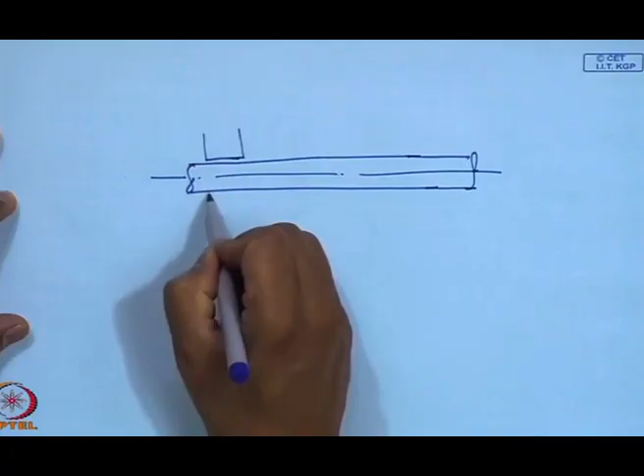I have a long rotor which is essentially supported in some sort of bearing. This is undergoing a speed of rotation omega, it is rotating at a certain speed, and this is the span of the rotor. These bearings have certain stiffness, say K1, K2, and there could be a heavy mass M on the rotor.

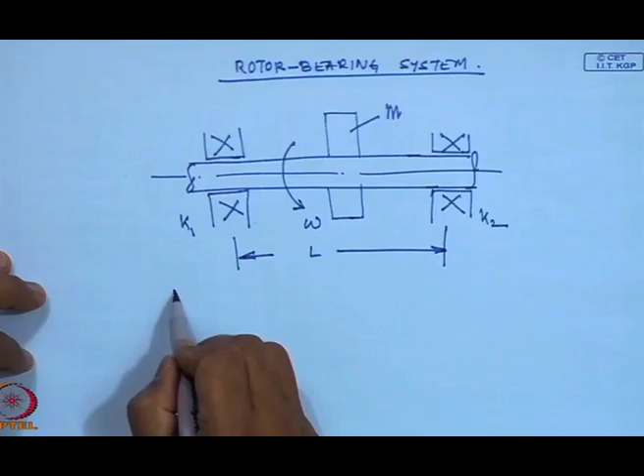So, if this rotor's stiffnesses are constant and stiff, the bearing supports are either rigid or soft.

When we have rigid stiffness on the supports and a simple disc which is rotating, this is basically the disc. We have the simple Jeffcott rotor. Much of the physics is understood by understanding the Jeffcott rotor, where we have a rigid support stiffness and then a certain disc which is rotating.

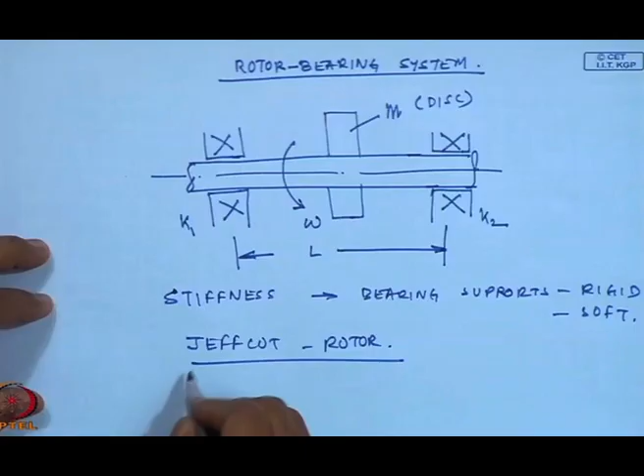So, when they are rotating, we will have what is known as the critical speed, a certain speed at which the speed equals the natural frequency of the system, and then we have the condition of resonance. This is very important in rotor systems.

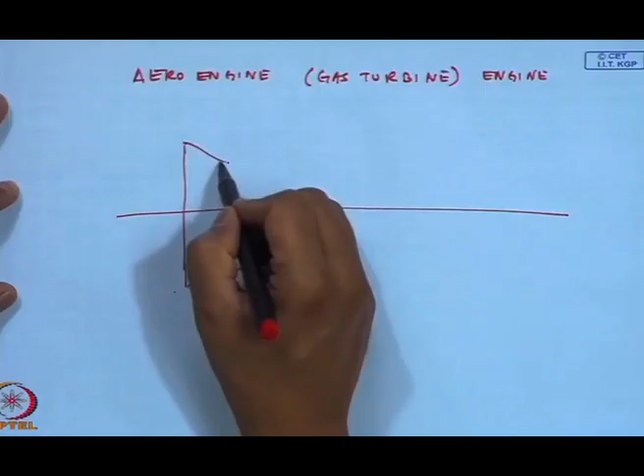Well, I have shown here one disc, but there could be multiple discs. For example, in actual conditions, think of an aero engine, or aircraft engine, which is essentially a gas turbine engine. So, we have a long system wherein the first stage is maybe a compressor set, and then we have the high pressure turbine.

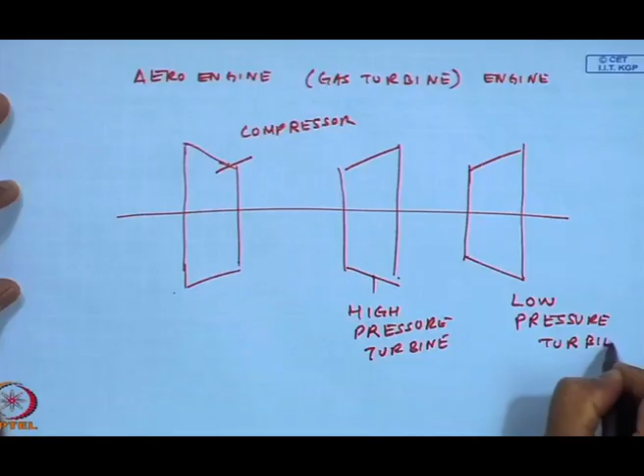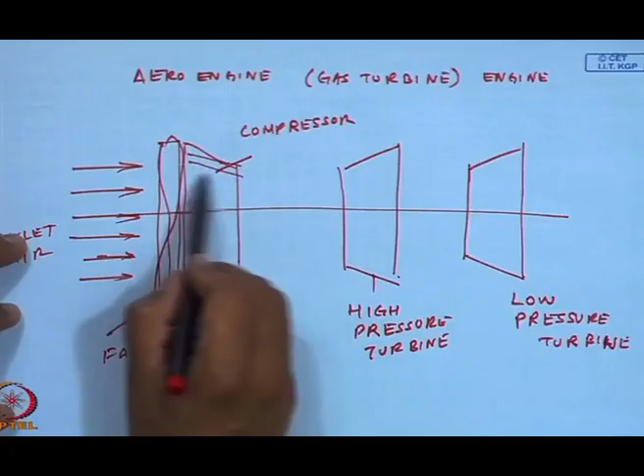Followed by another low pressure turbine. We have the air coming in, inlet air, maybe some sort of a fan could be here. Fan, and these compressors have a lot of sets of vanes, and the same is true in the case of turbines.

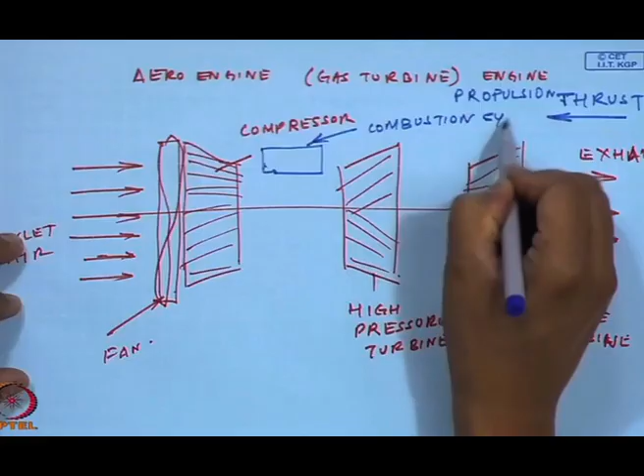And then we have the exhaust, which essentially gives the thrust to the engine for propulsion. Of course, in between we have the combustion system. I am not going to go into details of the gas turbine, but essentially our domain of interest is this drawn here in red, and then this portion here, and this is the long shaft, which are essentially all supported on bearings, intermediate bearings.

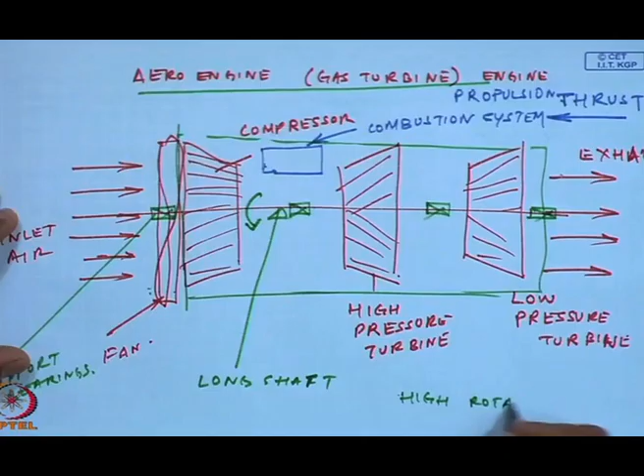So, a typical gas turbine engine has this kind of configuration, wherein on a long shaft I have a compressor followed by a couple of high pressure turbines, low pressure turbines, and each of these systems rotates at a very high rotational speed, typically of the order of 30,000, 40,000 RPM. So, you can imagine this engineering complex system, wherein on a shaft I have sets of vanes or blades mounted on discs. There could be multiple discs, and they are rotating at a very high RPM.

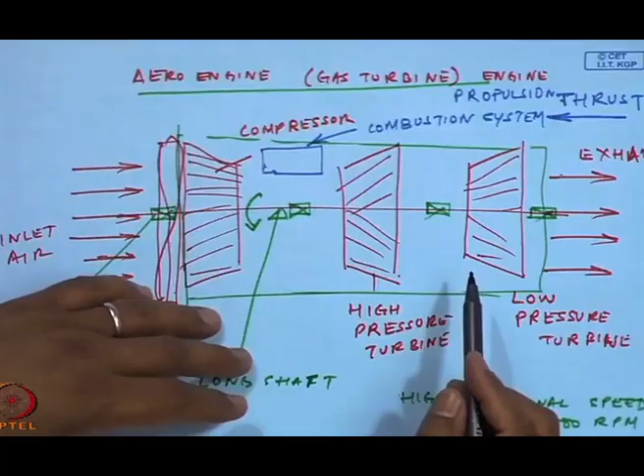Now, think of a scenario, there could be many issues. One is, what if the rotating speed has a speed which equals the natural frequency of the system? Then there will be a condition of resonance. So, condition of resonance occurs when this critical speed is equal to the natural frequency of the system.

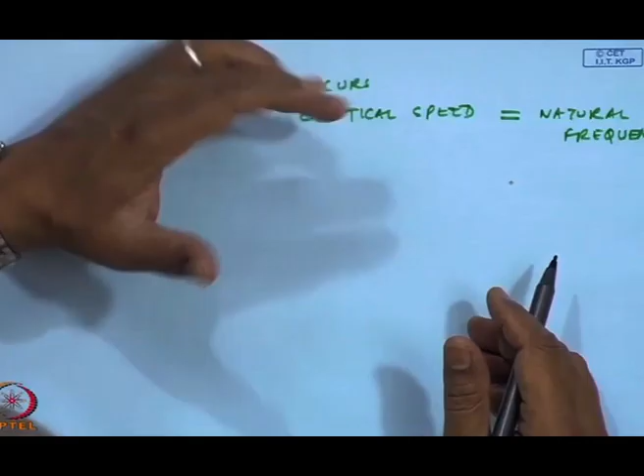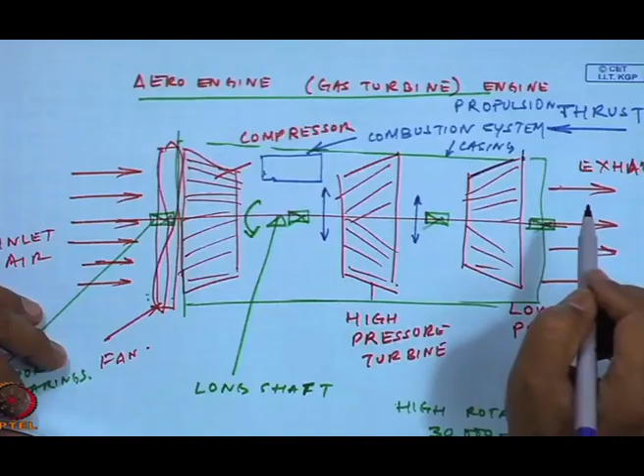So, when an aircraft is rotating, or the engine is rotating and powering the aircraft, there could be conditions of resonance, and because of this, there could be large amplitudes and large motions. This shaft, because of resonance, if it has large motions, it may so happen that if this was the casing, the blade sets may touch the casing. So, there could be lateral rubs, which can lead to a lot of things, high amplitudes.

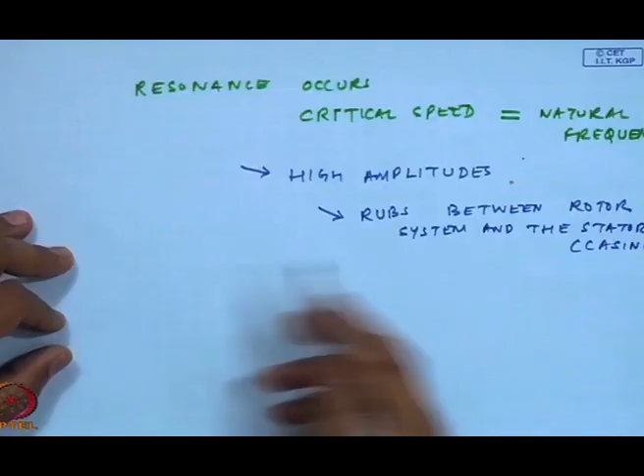This could further lead to rubs between the rotor system and the stator, in this case the casing. So, a lot of wear and tear will occur, materials may fail, components may fail. And then this is one instance.

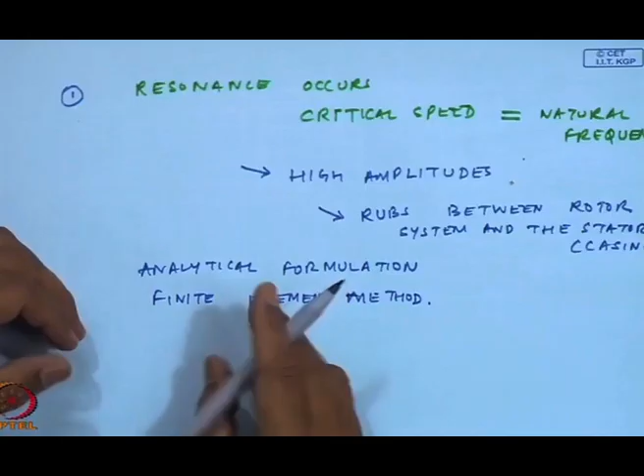So, by studying rotordynamics, if we can physically model such a system through techniques of analytical formulation or through the finite element method, we can try to estimate the critical speeds and avoid them during operations. This is one of the important objectives of studying rotordynamics.

The next is to determine design modifications to change critical speeds. We can do certain design modifications to change the critical speeds. Through these mathematical models, we can change the mass and stiffness of the appropriate system and change the critical speeds, omega n equals root over k by m. So, as a designer, we can play around with the values of k's and m's and change the critical speeds.

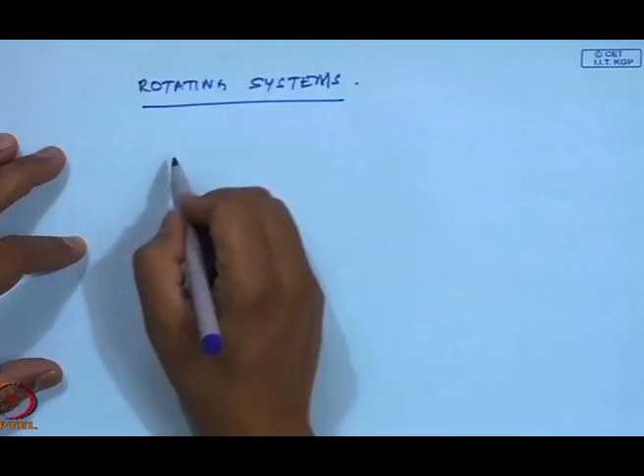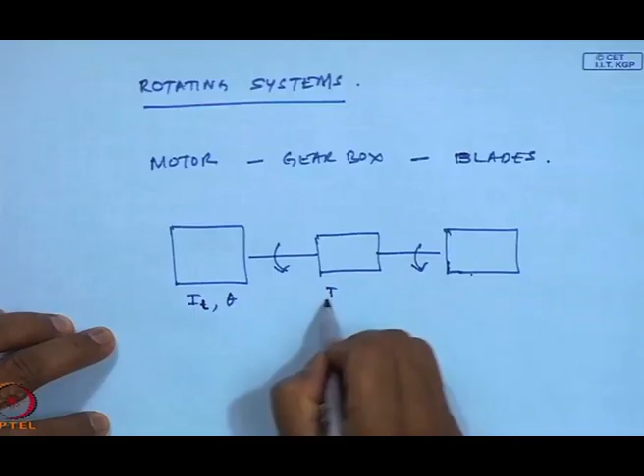We have in one case wherein there are many rotating systems, many subsystems in one unit. That could be, for example, a motor driving a gearbox, driving a set of blades. They are all rotating, the shafts are rotating. Motor driving a gearbox, driving a set of blades. All of them have rotary inertias, and then they have the corresponding rotary displacements, etc. So, such subsystems can have...

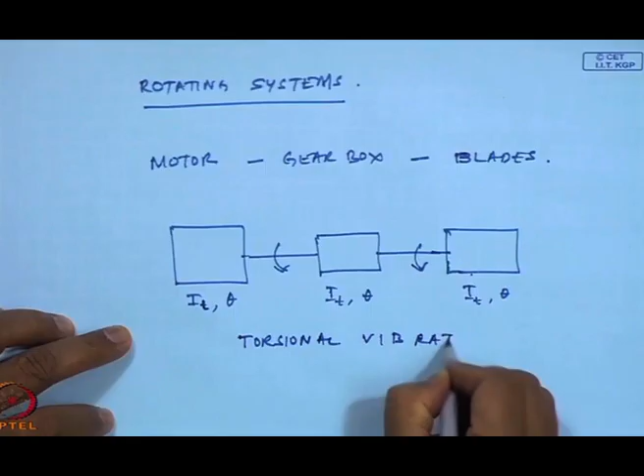...and then you have the natural frequencies. Like in the case of a linear system, we had multiple degrees of freedom and every degree of freedom has a corresponding natural frequency. When you have torsional rotating systems, every subsystem can also be having natural frequencies, and these are basically torsional natural frequencies. If we can predict them and know them beforehand, we can as a designer or an operator ensure that we do not run the system at its natural frequencies. So, estimating the critical speeds, doing design modifications, and then estimating the natural frequencies of torsional vibration is very, very important in the study of rotordynamics.

The next would be, in a rotating system, if you think of the case of a gas turbine we just talked about, there is a small amount of unbalance in one of the vanes or blades, and once they rotate at high speeds, we will be having very, very high unbalance forces. These forces are radial in nature, and because of this unbalanced forces, we will be having forces at the bearing supports, and sometimes these forces could be very high, and we have to ensure how to reduce these forces, otherwise the bearings are not able to withstand such high forces. So, as a good designer, we have to ensure that the unbalanced mass rotates at its center of rotation, or everything is centered around the rotation and not away.

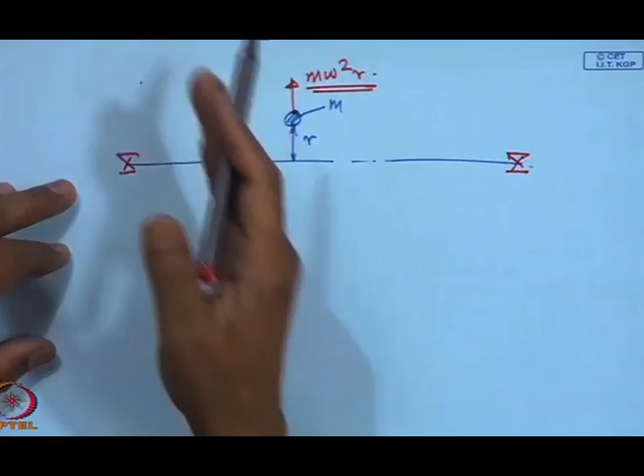Calculate and do the balance correction and locate a location from the measured vibration data. Now, when we talk about balancing in the few classes down the road, we will see how we can balance such unbalanced forces either in single plane or in multiple planes, and give correcting unbalanced masses, so that the net effect is reduced. For example, in this case, if I have an unbalanced mass at a distance r in this direction, I can give another unbalanced mass of the same quantity at a distance r opposite. If I draw this plane, if I have an unbalanced mass here, I can give a correction mass here, and reduce the net forces.

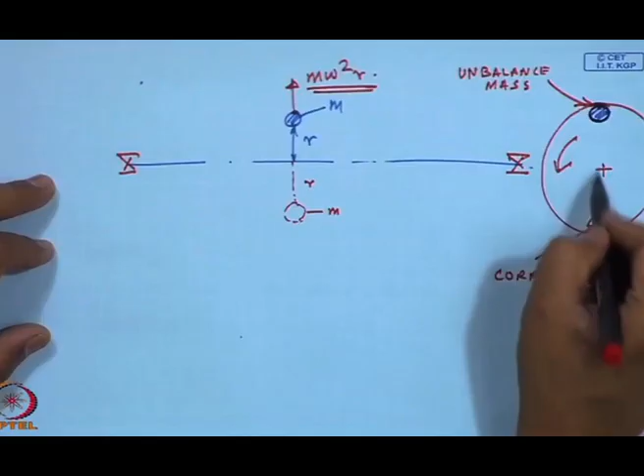And then another problem is, we can also predict the amplitudes of vibration caused by such rotor imbalance. Now, I am having these two words, synchronous. So, when a system is rotating at a particular RPM, we denote it as omega, 1 times x, which is the rotational speed, and any vibration at this frequency is known as synchronous vibration. So, any frequency less than omega is sub-synchronous, and any frequency greater than omega is super-synchronous.

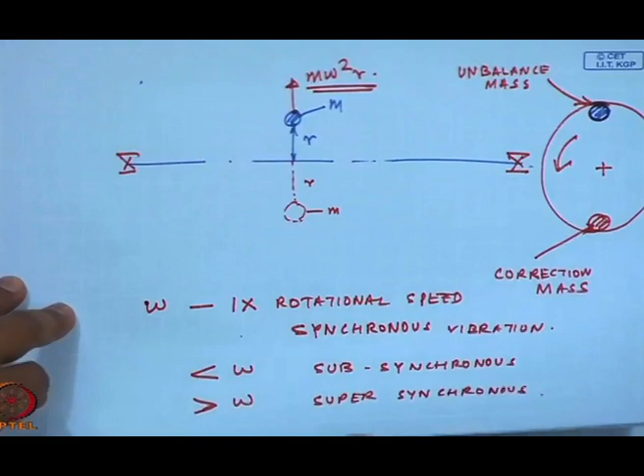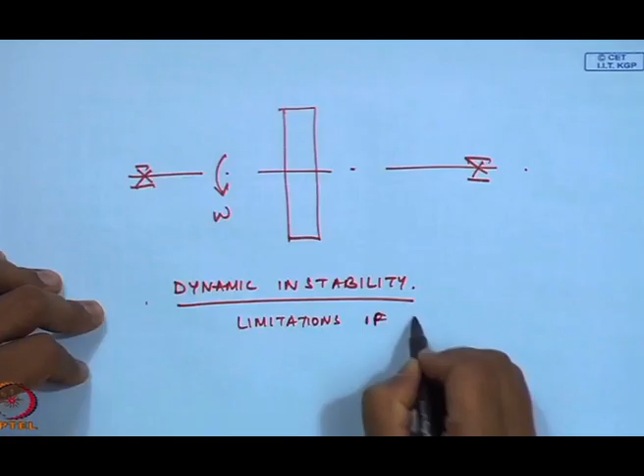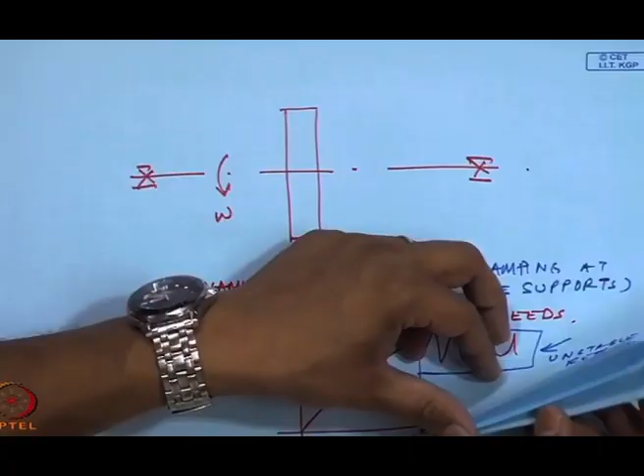Later on, you will see when this rotating shaft is rotating at a particular speed, having a disc, there will be speeds at which there will be a lot of dynamic instability. In fact, this is one of the serious problems and limitations of rotor speeds. In particular, if you plot it as omega versus amplitude, at certain speeds it will happen. These are the speeds which, if we increase further, form a critical speed beyond which we should not operate, or if we have to operate, how this can be controlled. I will tell you right now, by controlling the damping at the supports, we can control this dynamic instability in rotor systems, and there are many ways to suppress this dynamic instability.

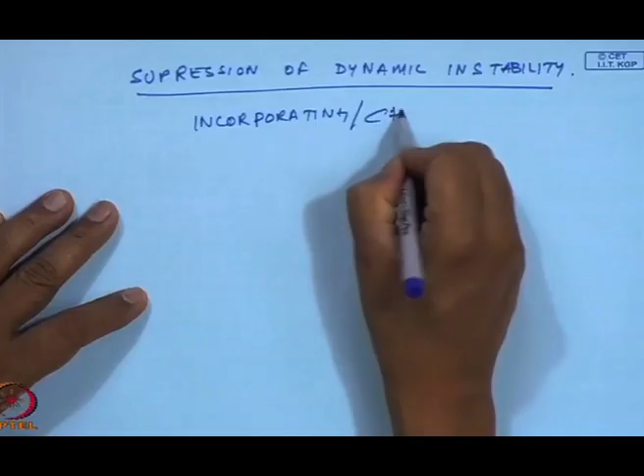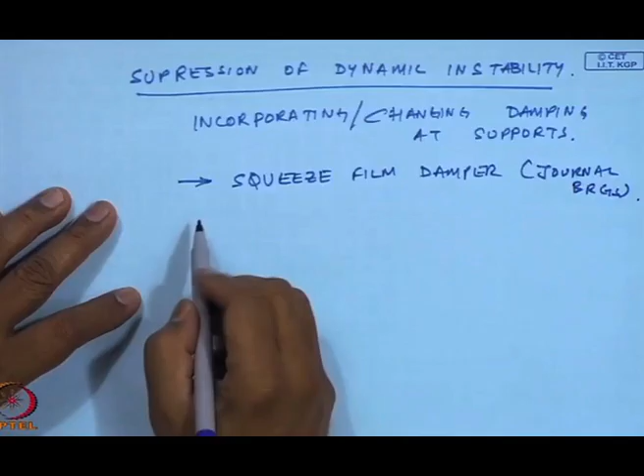This is essentially by designing or incorporating or changing damping at supports. This has been possible by having what is known as a squeeze film damper in the case of journal bearings, and sometimes in rolling element bearings, which are essentially very high stiffness bearings, almost rigid supports. In some way, by having an SFD, squeeze film dampers, in the outer race, some amount of damping control can be done. Of course, people have used magnetic bearings to control dynamic instability in rotors, and that is still right now in a research stage, I would say, or very few practical applications have come out of magnetic bearings to control the dynamic instability.

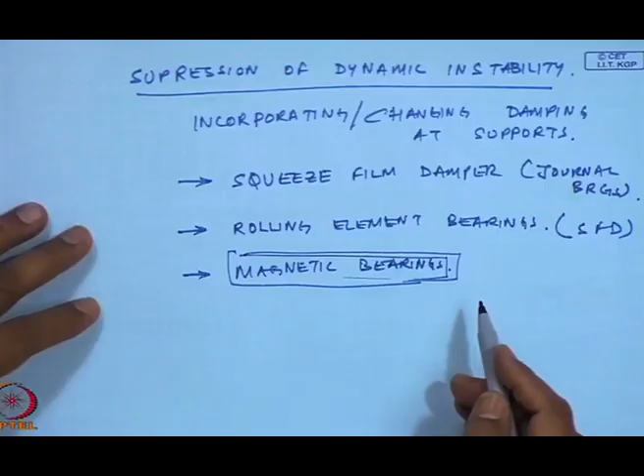In small systems, magnetic bearings have been successful, but in large systems there are other issues with using them. Traditionally, squeeze film dampers have been used in the case of journal bearings to suppress this dynamic instability. And though we use rolling element bearings, some amount of SFD, particularly in aircraft engines, has been done to support and suppress the dynamic instability.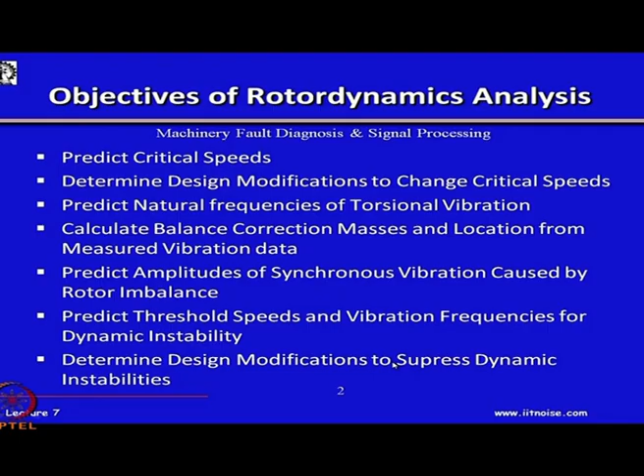So, to summarize, the objectives of rotordynamic analysis, as I have listed here, are: predict the critical speeds, determine the design modifications to change the critical speeds, predict natural frequencies of torsional vibration, calculate the balance correction masses and location from measured vibration data, predict amplitudes of synchronous vibration caused by rotor imbalance, predict threshold speeds and vibration frequencies for dynamic instability, and determine design modifications to suppress dynamic instabilities.

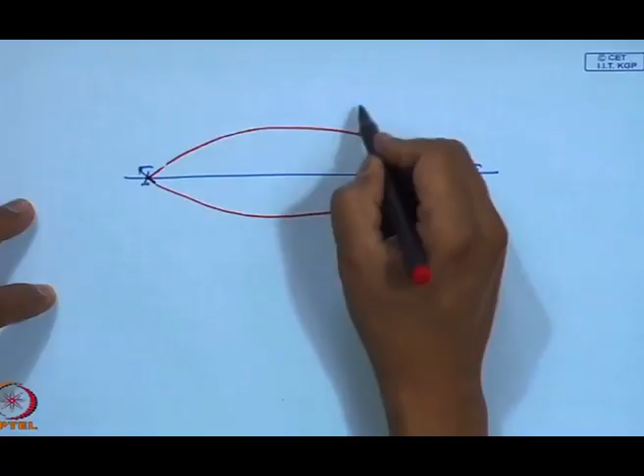Now, there are a lot of things that happen when we are rotating a shaft at a particular omega. There will be a whirling of the shaft, and this is the bow of the shaft. The first assumption is we have considered the shaft is flexible, so that it can bow.

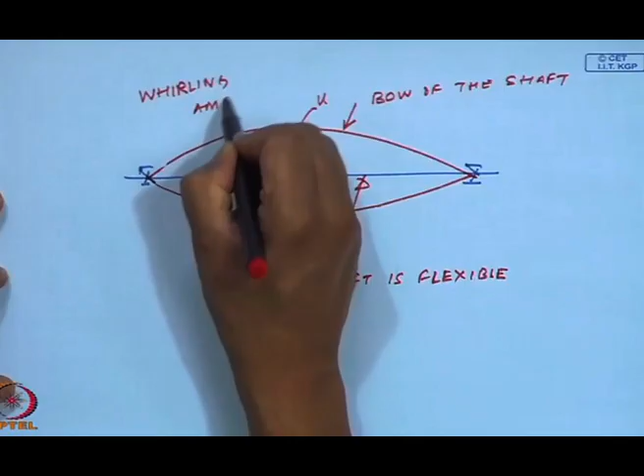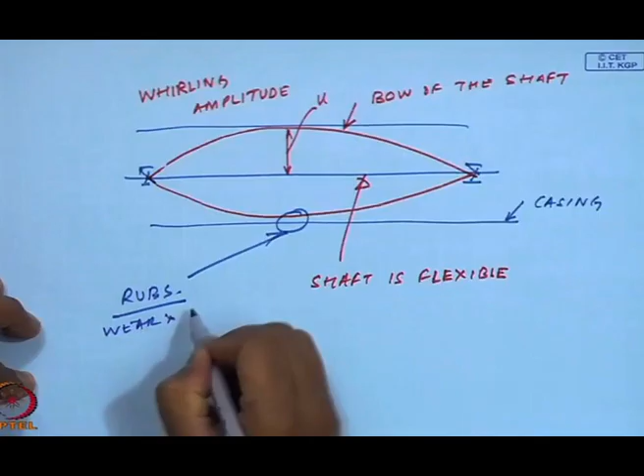So this whirl amplitude, maybe if I denote it as u, our objective is to reduce this whirling amplitude, because what happens if it whirls, sometimes it may foul with the casing in a system. Suppose this is my casing. Once it touches here, these are the regions where rubs are going to occur, and this is going to create wear and tear, excessive force, and then material may fail.

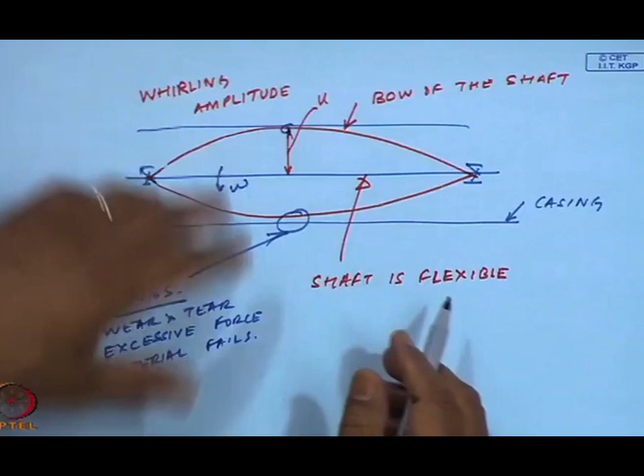As I was telling you, to reduce the synchronous whirl amplitudes, I have to balance the rotor, so that this unbalanced mass is a minimum, so it does not fly out, or avoid rotating at that particular speed omega. Try to change the speed, and if nothing is possible at the bearings, we can use SFD, so that the support forces onto the bearings is going to reduce.

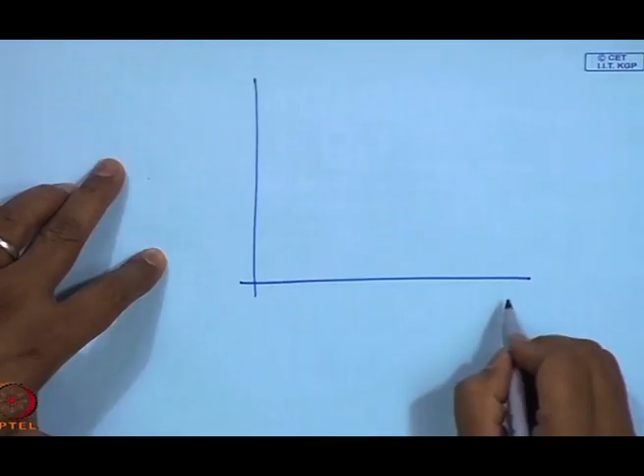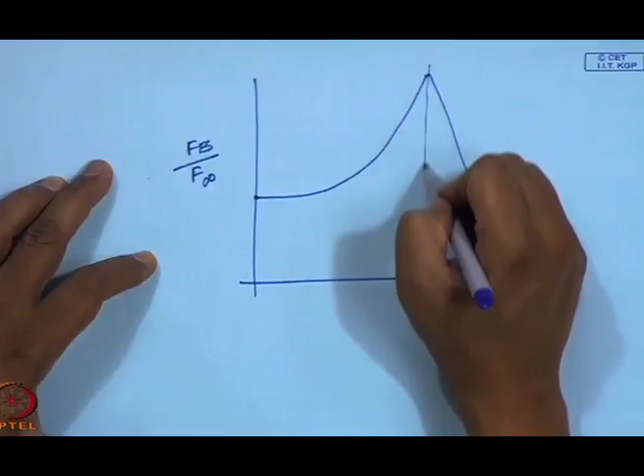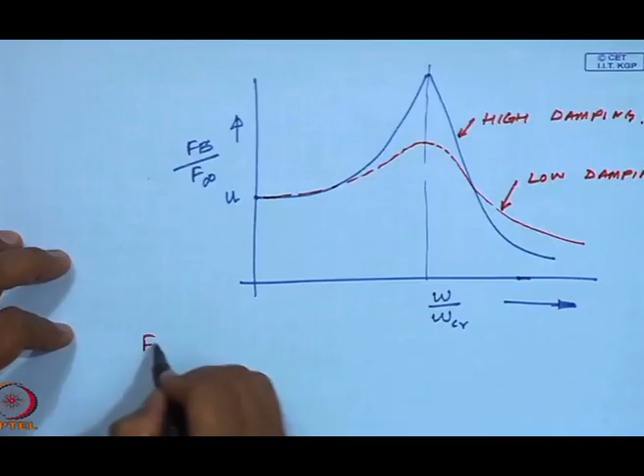Now, if I think of a rotor system, suppose let me just draw this. The ratio of the dynamic force to the forces on the supports when the supports have a rigid stiffness, and this is u. Now, if I increase the damping, where F infinite is the force at the support in the case of rigid supports.

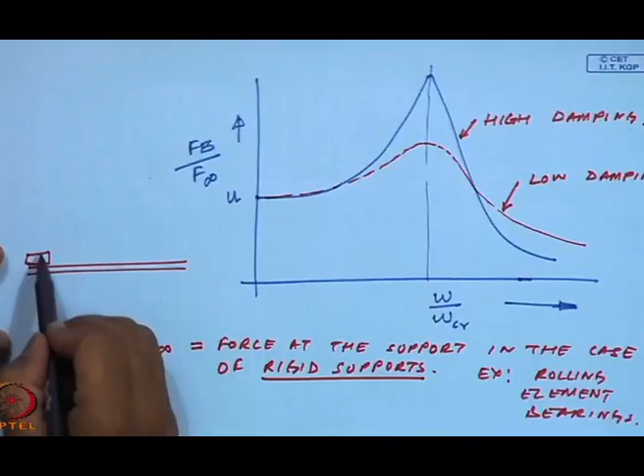Example: our rolling element bearings. So if I have a shaft which is supported on rolling element bearings, and if this is going to have an amplitude u, the F infinite at any location will be half m omega square u. And you will see for large machines this force is very high. When the mass m is high or at high speeds, the forces are very high in case of large rotating systems.

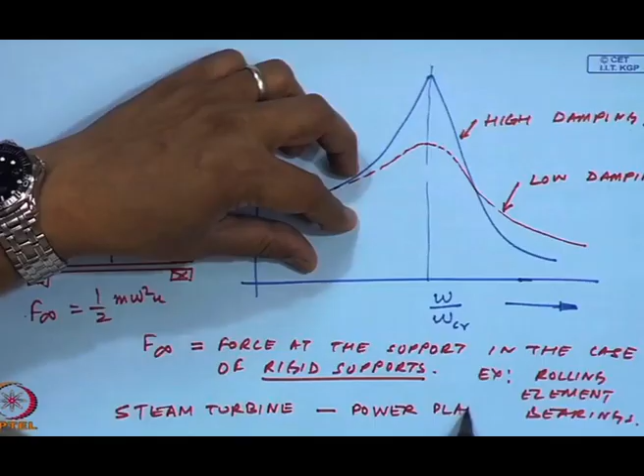When you are talking about, say, a steam turbine, which is essentially used in power plants, the force, if they were supported on rigid bearings like rolling element bearings, ball bearings, etc., would be very high on the support. And there is no way, no mechanism, no physics by which we can reduce these forces which are coming to the supports. There is another way by which we can reduce these forces, and that is known as the journal bearings. But let me give you an example.

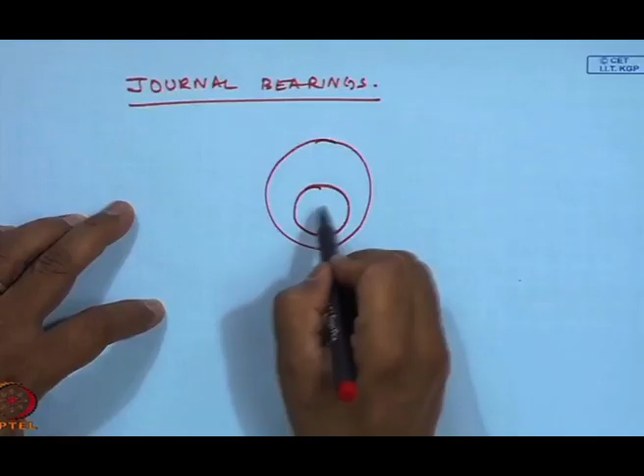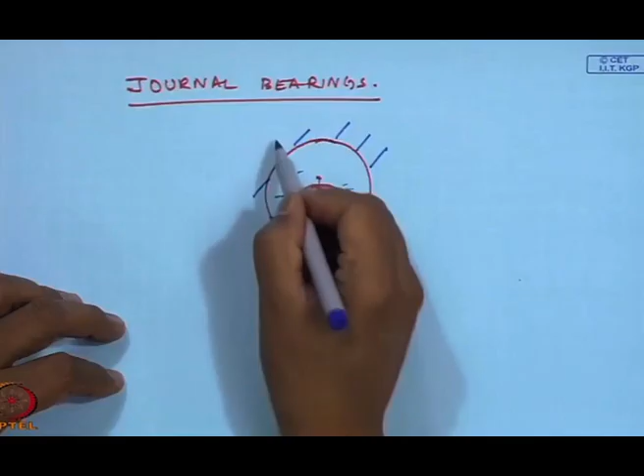In journal bearings, essentially what happens, I will come to the journal bearing first. Suppose I have a shaft which is rotating, and this is filled with oil, and because of the eccentricity between the center of the journal and the center of the shaft, I will have a converging diverging section. This shaft is rotating like this and the journal is fixed. Because of this converging diverging section, there will be a fluid pressure.

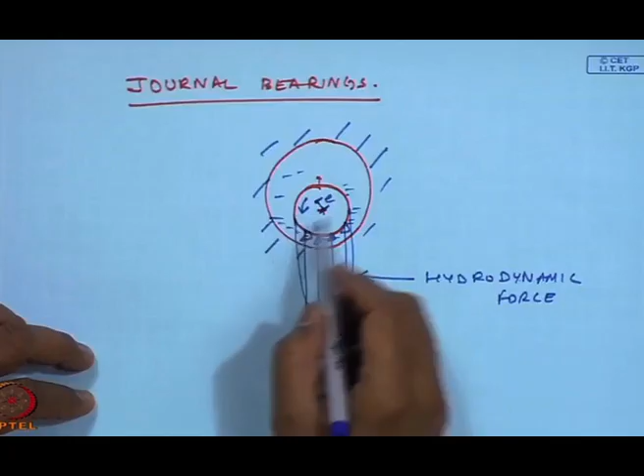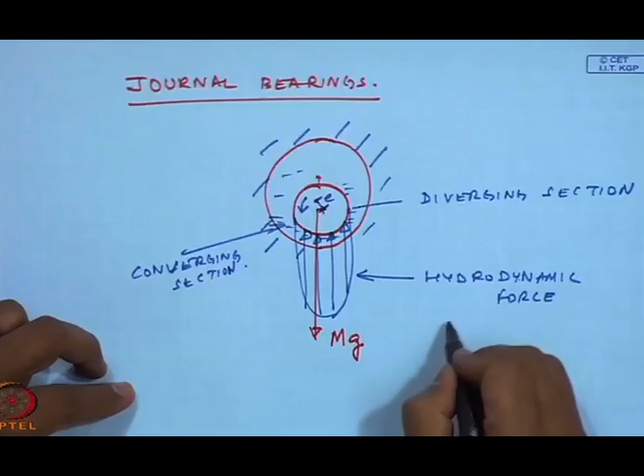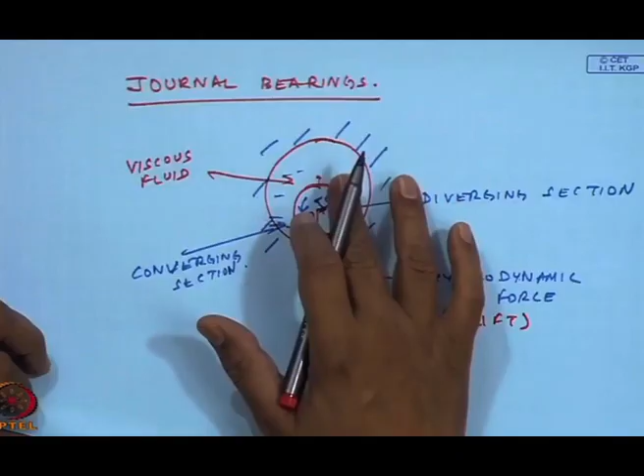This hydrodynamic force, which happens because of the converging section and the fluid's viscosity, the load of the shaft, the load coming as mg, can be supported by the bearing forces because this gives a lift force. So when I rotate a shaft at an omega in a journal filled with viscous fluid, because of the eccentricity E, this fluid will try to build up a pressure, and this pressure acts in the upward direction and supports the weight coming at the support.

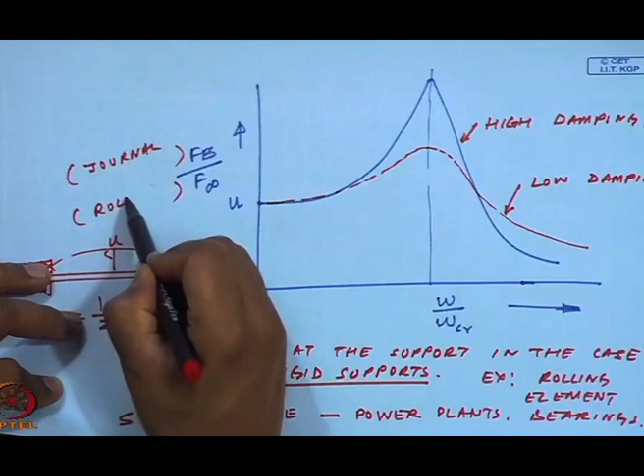So in journal bearings, essentially the fluid viscosity comes into play, and we can introduce damping and thus reduce the force coming onto the bearing. If I go back to this plot, this is because of the journal bearing, and this is because of the rolling element bearing. So I can reduce the loads coming to the supports by introducing damping, which is only possible with a journal bearing.

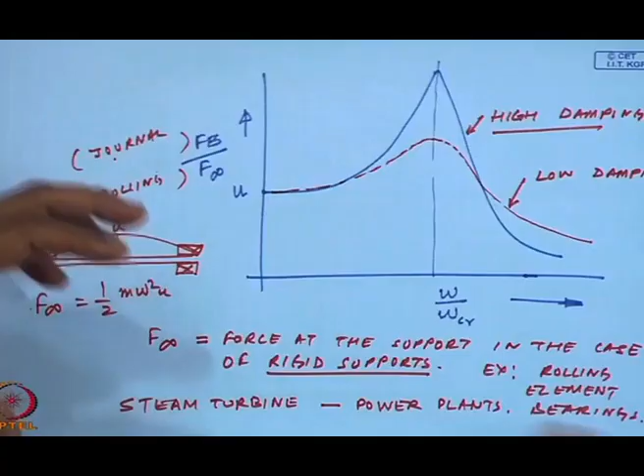So in any system, like steam turbines or power plants, if I have a large or long shaft carrying disks of compressors, turbines, etc., and if they were supported on rolling element bearings, a lot of forces would come onto the supports. Instead, if I use a journal bearing, because of the fluid viscosity and the eccentricity of the shaft from the center of rotation, I will generate a fluid pressure acting in the upward direction, and this is able to support the loads coming onto the supports and reduce the forces.

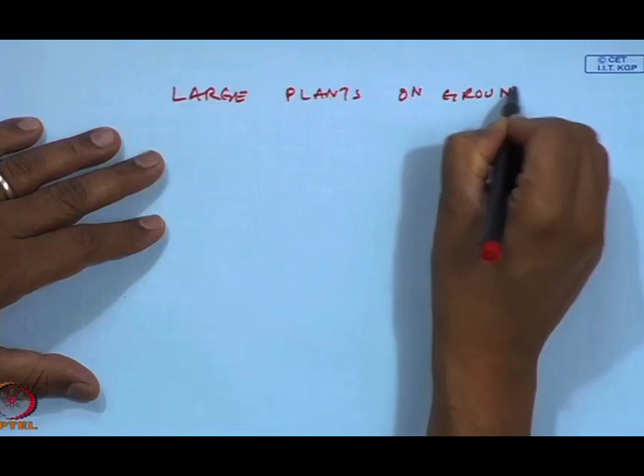And this can be very easily controlled by varying the amount of fluid flow, the viscosity, etc. This can be changed, and then I can reduce the forces. So invariably in many stationary plants, large plants which are on the ground, we have journal bearings which will try to reduce the forces coming onto them.

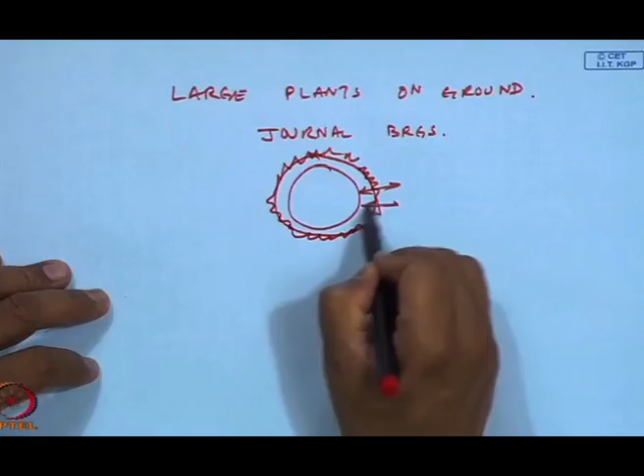And on these journal bearings, if I have squeeze film dampers, basically I have a system wherein I am squeezing and having a vertical motion radially. I can put a squeeze film damper, and this is made to oscillate along the outer race, and this way I can introduce damping. As you have seen, by introducing damping, the load carried at the supports does reduce, so damping has a very important role in rotordynamics, as it can reduce the support forces and control instability.

So, going back, the effect of support bearing stiffness and bearing support flexibility can greatly reduce the dynamic load transmitted through the bearings, as we just discussed. By having the support flexibility properly selected, I can reduce the dynamic load transmitted through the bearings. Bearing support damping increases the dynamic load transmitted through the bearings at high speeds, as is also obvious from that plot. Bearing support stiffness may be necessary to keep the transmitted load within acceptable limits while traversing the critical speed. Improperly chosen support parameters can produce dynamic loads in excess of the rigid support values.

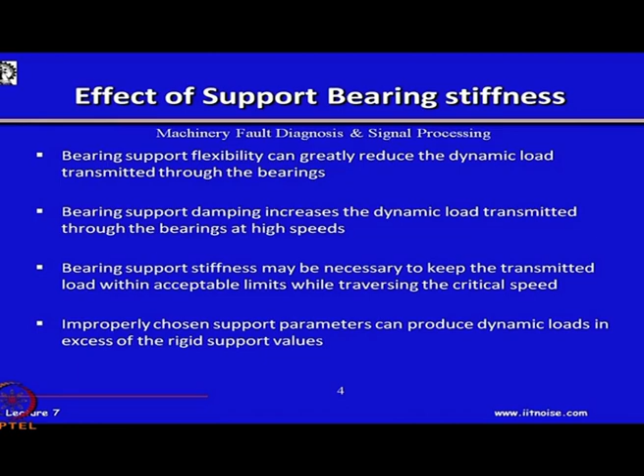And imagine if I have chosen certain damping parameters such that the forces are very high, then we are going to have a failure of the supports, and this will not be accepted or allowed. So how can we reduce that? Now, what do I mean by rotordynamic instability?

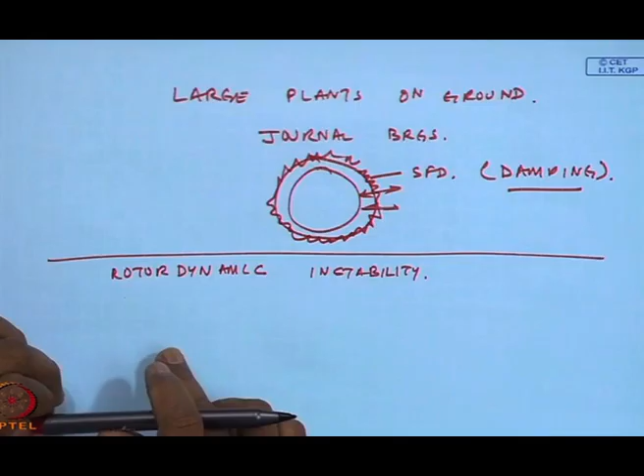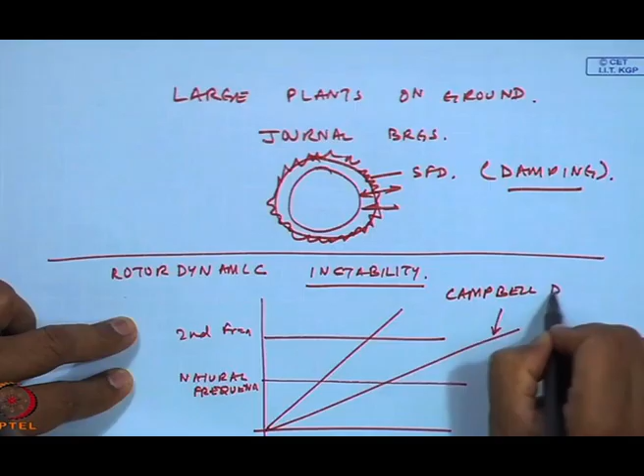And with this, suppose I have this RPM curve, and these are the first natural frequency, second natural frequency, so there will be some frequencies, and these are basically known as the Campbell diagram. There are regions you would like to avoid operating in, wherein your running speed should be such that you are operating below these natural frequencies, or operating at a speed in between these natural frequencies. So this kind of RPM versus natural frequencies plot needs to be generated for multiple rotor systems or large rotor systems, so that the conditions of resonance because of critical speeds are avoided.

So with this basic understanding about the importance of support bearing stiffness and how it contributes to the overall forces coming onto the supports, when we design a turbomachinery, these are some things to keep in mind: avoid critical speeds if possible; if you have to operate through the critical speeds, traverse it very quickly. Like in a gas turbine, we have to rotate at 30,000 RPM. Once you go from start to 30,000 RPM, there will be a number of resonances you have to pass through. So you need to quickly move through the resonance into the operating speed of 30,000 RPM. We cannot be rotating constantly at the same natural frequency, so the ramp up or speed up has to be very, very high.

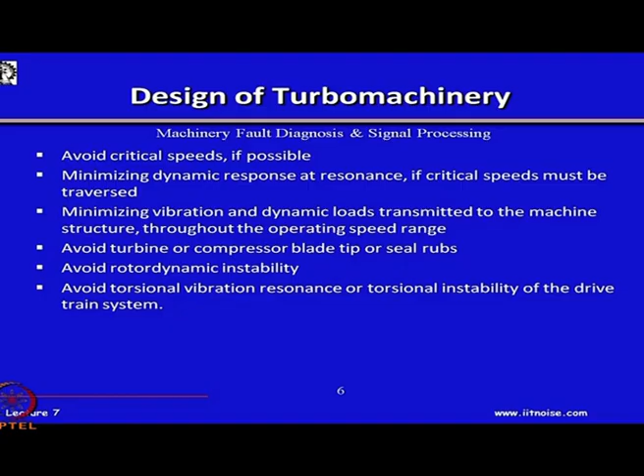We can talk of our aircraft engine, steam turbine, even a large set of pumps, but these have to be taken into account. Some of them are vertical - if you go to many power plants, particularly the hydel power plants, you will see a lot of vertical turbines, like the Kaplan turbine, where the shafts are not horizontal but vertical. We have the effect of gravity loads altogether on the bearings. How do you select the bearings - thrust bearings, pivot bearings, pad bearings - and how do you take care of these issues? So a turbo machinery from a dynamics point is a very complex thing. As a designer, people do take care of it, but our goal in this class is how do we maintain and monitor the health of such large complex turbo machineries.

So just to recap, we have already discussed about the bearings. Bearings essentially are of two types: the rolling element bearing, or the journal bearing which is a fluid film bearing.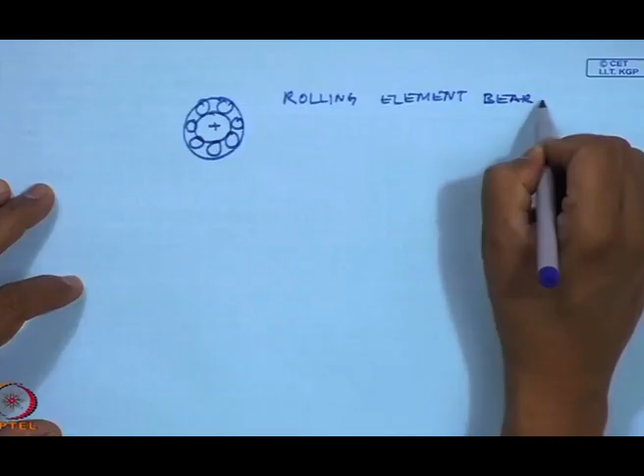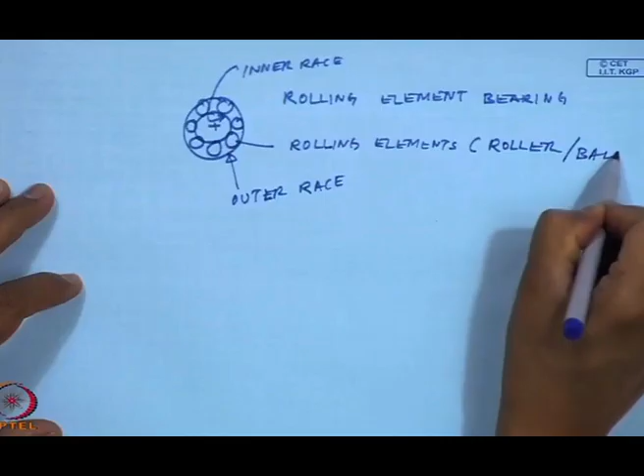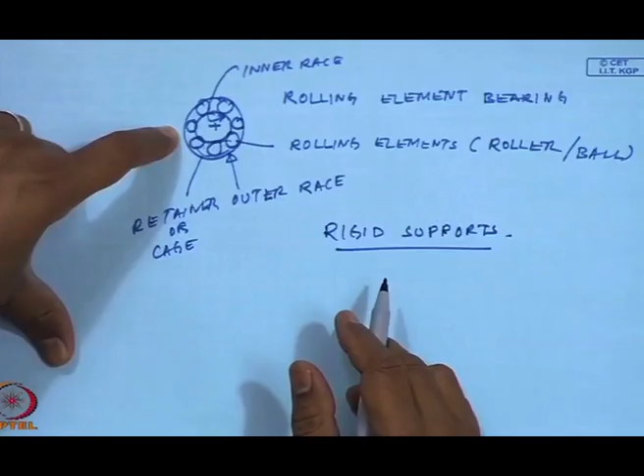In the rolling element bearing we have the outer race, the inner race, and the rolling elements, which could be either a roller or a ball, and they are supported by what is known as a retainer or a cage, which ensures that no two rolling elements come in contact with each other. Basically, they are used for rigid supports. In essence, rolling elements are good where the forces on the supports are less, because when the forces are very high, due to the physical dimensions of the bearings, they may not be able to support very high loads, as in the case of the turbines we discussed about.

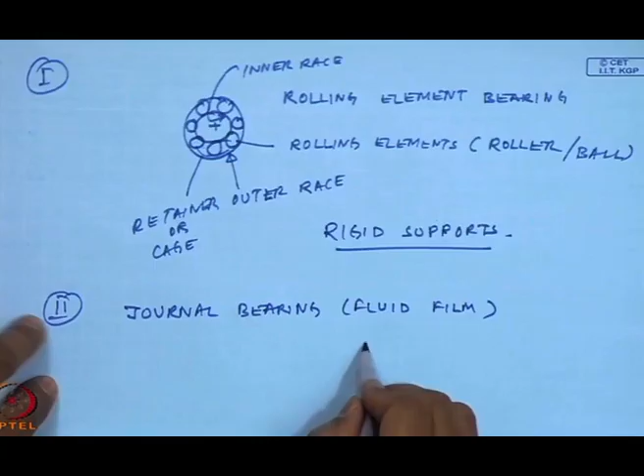But the other kind of bearing is the journal bearing, or the fluid film bearing. Basically, in the journal I have a shaft, and because of this film and the converging-diverging section, and because of the eccentricity of the shaft, there is a pressure buildup, and this pressure is actually supporting the shaft. So at no point during rotation is there any rigid contact between the shaft and the journal - only maybe at rest.

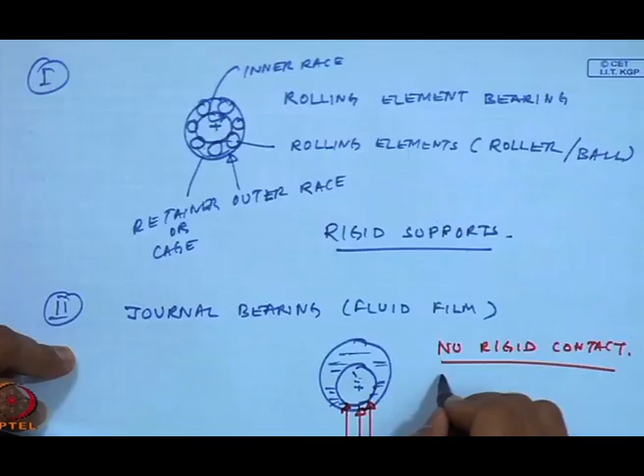At rest, this is in contact. So every time you start or stop a machine, the entire rotor system comes and sits on this, and there is a lot of wear and tear in the journal. That is why these journals are made out of soft bearing materials, like babbitts, which can withstand high temperature as well.

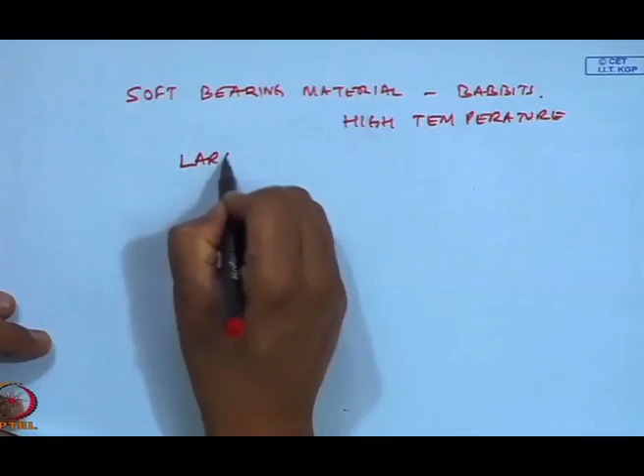Because of the physics of the journal bearing, they can support large loads. So basically all the steam turbines, or the land-based gas turbines, have journal bearings, and this film lubrication is the hydrodynamic lubrication that is occurring.

In journal bearings, the pressure is built up because of the eccentricity of the shaft and the journal, creating a converging-diverging section. But if I have a source of externally pressurizing the fluid and applying it to the journal, I could support the large loads coming at the bearing supports, and such are the hydrostatic bearings. We are not going to go into the details, but as opposed to hydrodynamic or journal bearings, there is never any contact between the shaft and the journal. So very precision instruments or equipment have such hydrostatic bearings, wherein we apply externally pressurized oil or lubrication into the journal and the shaft.

In our case we have journal bearings or rolling element bearings. In rolling element bearings, if in the outer race I add a squeeze film damping arrangement where I can change the damping, this is actually used in aircraft engines. Other than rigid rolling element bearings, they also have squeeze film dampers on the periphery which will not rotate but only oscillate, creating damping. Because of this damping, the forces on the bearing support come down.

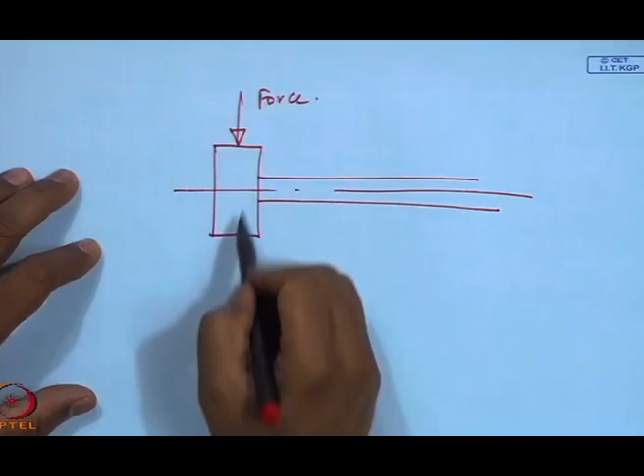By having a transducer, this deflection could be measured by an LVDT, or you can put an accelerometer and integrate it to get the deflection. So just to know the static stiffness K delta, I use such an arrangement wherein we give a force, measure the deflection, and find out the static stiffness.

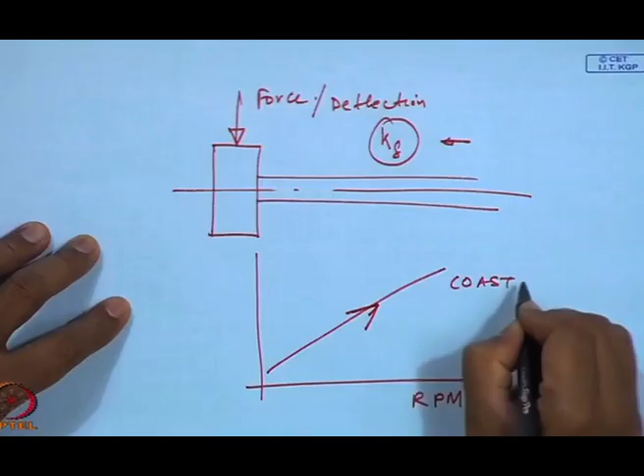Many times, to understand the cases of resonances, we can do a coast-up test, wherein we increase the RPM at a particular rate, or come down from high speed, which is coast down.

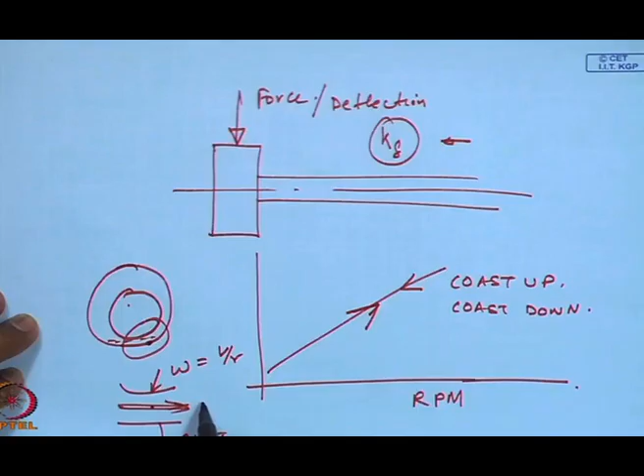Particularly in the case of the journal bearing, a very important thing happens. If you enlarge the bearing, basically the forces here are such that one surface is at rest and the other is moving at a speed of omega, that is v by r, a linear speed. So there will be a point wherein the entire film in the middle will be having a speed of omega by 2. So this fluid in the wedge is theoretically moving at a frequency of 0.5 omega, or the fluid is churning, whirling at a speed of 0.5 omega.

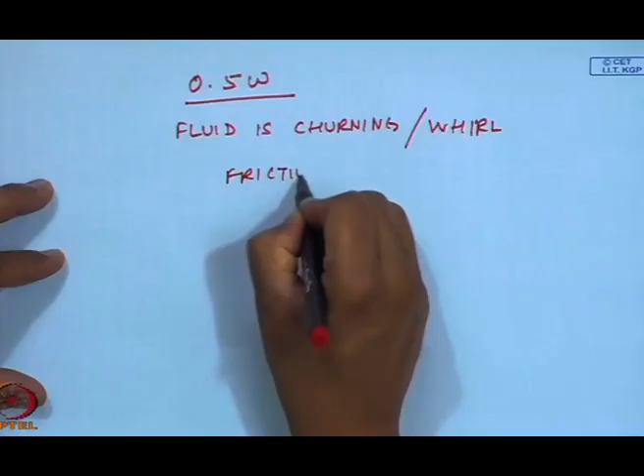But usually, because of the frictional losses, this frequency is around 0.42 to 0.48 of f, where f is the rotational speed. So anytime I have a shaft rotating at a frequency of f, I will see a predominant frequency somewhere around 0.42 to 0.48 f.

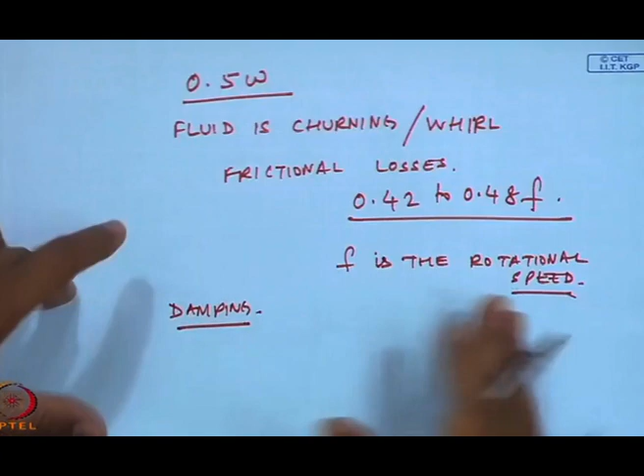So when you do a coast-up and coast-down analysis, you will very easily see the effect of whirling, and this can be removed by changing the damping, etc. In the laboratory, we have rotor rigs wherein at one end we have a journal bearing with a particular type of lubricant, say oil, and next time kerosene - you will see the effect of whirling pretty much there.

Many times we do a lot of constant speed measurements in rotor systems. And of course, the last one is the resonance test, which we do on rotor systems to find out the natural frequencies of such systems, so that we can avoid rotating at the natural frequencies.

Some of the common faults which occur in turbo machinery are cases of imbalance, misalignment, load variations, mechanical looseness, critical speed or resonance, excessive clearance in fluid film bearings, rotor rub, oil whip, and oil whirling.

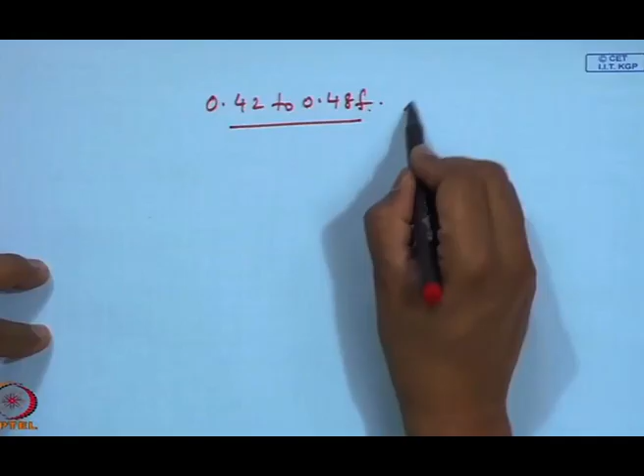Another important thing that happens is oil whip. For example, we are rotating at a particular frequency, and oil whirling occurs at 0.42 to 0.48 f. What happens is there will be some multiple at which this becomes equal to the natural frequency of the system. In such a case, the rotor is going to whip around at that frequency - it is going to bow, and then latch on to this frequency, which is known as the whipping frequency.

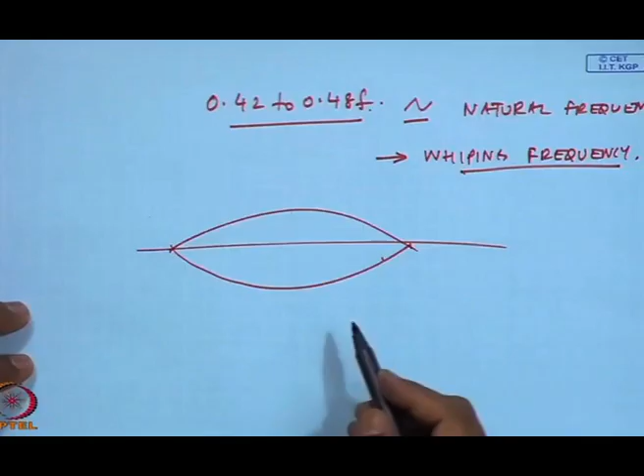This we will discuss when we talk about the case of unbalanced responses in rotor systems, where this whipping occurs.

To summarize, in this class we discussed the requirements of rotordynamic analysis - how the bearing support stiffness, and in particular the damping, plays a role in the support forces that come to these supports, how we can select the kind of bearing, rolling element or hydrodynamic, to take care of the loads, and what defects could be there in rotordynamic systems and how we avoid them. Thank you.